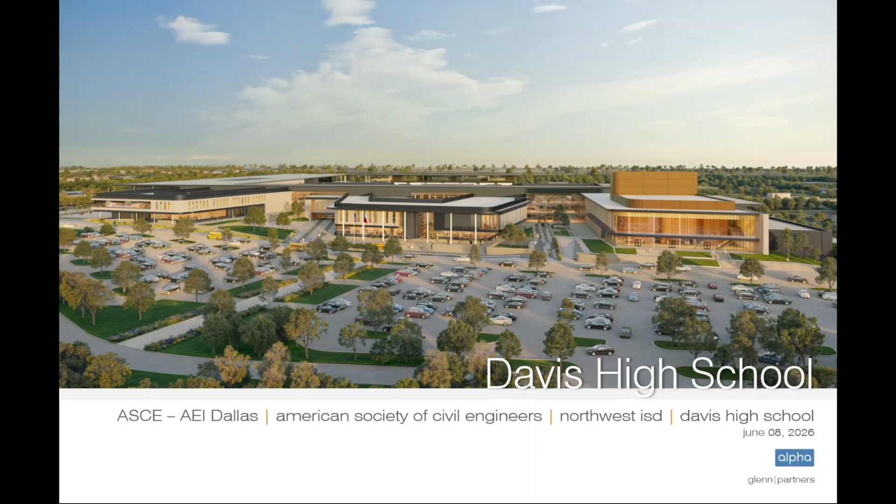Good morning, everybody. My name is Patrick Glenn, I'm the architect at Glenn Partners, and I'm not going to talk a lot today. The project's actually going to speak for itself. It's an amazing project. We couldn't do projects like this without Jared and Stephen and their firm, Alpha Consulting Engineers. We've pushed them quite a bit architecturally, and I think you'll see that in the presentation.

There's a lot of stuff written up on the screen, and I'm not going to sit here and read it to you, just for brevity of time. I'm just going to go right into the design team. I think we had a wonderful introduction this morning. Again, my name is Patrick. This is Levi, Stephen, and Jared.

All I want to do is just highlight a couple of things as it relates to project numbers. So 795,000 square feet in this high school, all on one campus, which is pretty absurd. It's on 128 acres, and these 128 acres slope about 75 feet across the site, so there's a lot of split levels throughout the design. $465 million. 145 classrooms — in fact, I counted these yesterday, it was actually 146.

Those 146 classrooms serve 3,200 students when this high school gets fully built out. There are 4 distinct learning houses with 4 different outdoor courtyards that support those. A 7,500 seat stadium, a 1,200 seat theater. I think there's an arena that seats about 3,500. It's just over the top on every single element of the project. So I'm going to stop talking and let Levi, Jared, and Stephen actually show you all the details.

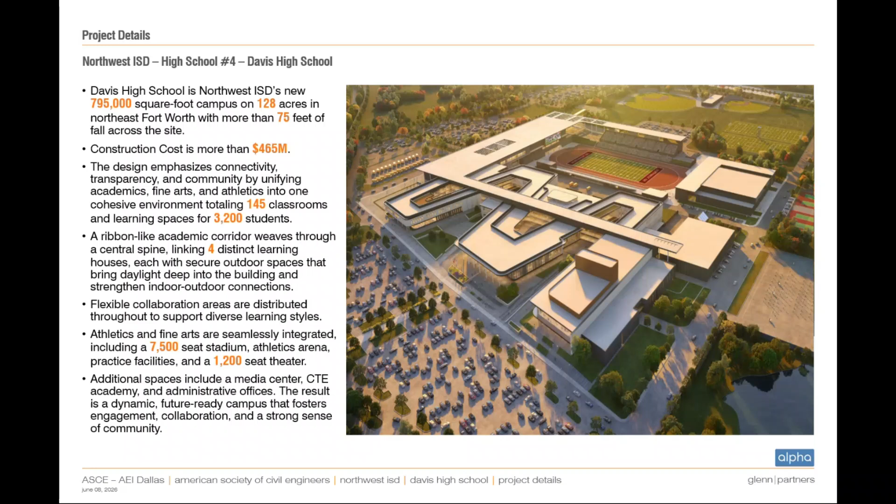So we'll start off with our site analysis. I'll try to keep this brief. This star is located where our site actually is.

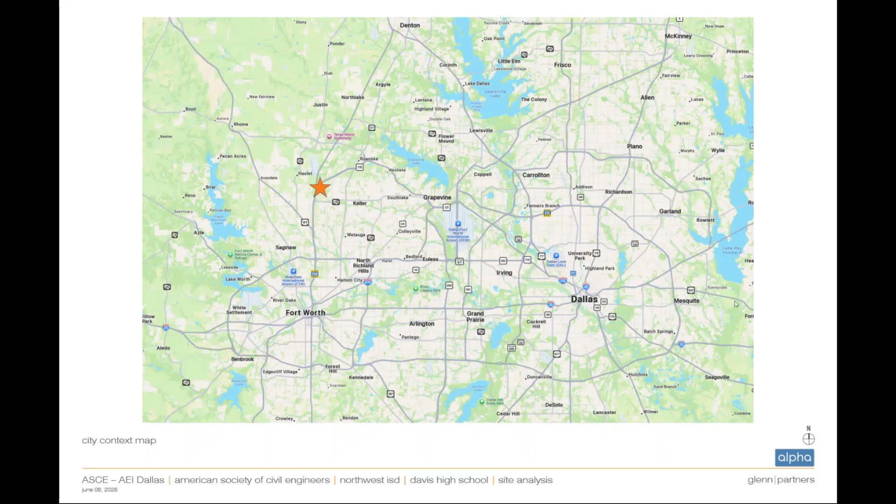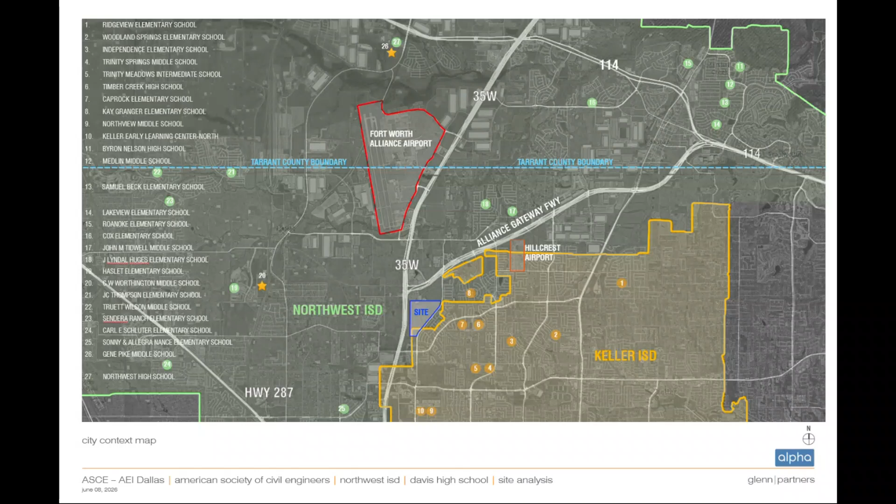It's right up near Alliance Airport, right across the highway from it. You can see Alliance highlighted here in red, and our site's that little blue triangle next to the Keller ISD map. So this is actually on the boundary of the Northwest District.

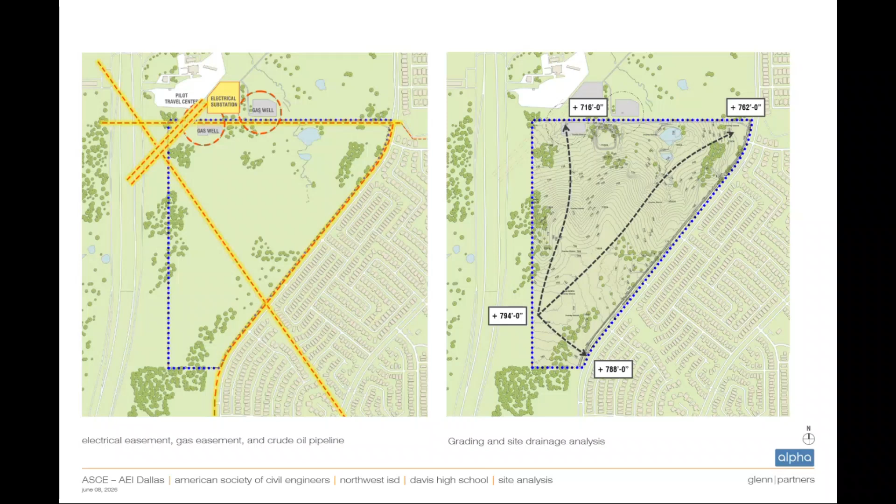Probably one of the most challenging sites I've ever worked on. As Patrick mentioned, there's 75 feet of fall on this site. It's not flat, it's not square. It has a few easements running through it on the left - a lot of easements, actually, which made it really challenging to site everything on the project and all the program elements.

Just to hit a couple of highlights here: there's 83 borings on the geotech. I think we've got over 8,000 feet of retaining walls on the site, which was a record for me. It's a lot.

Subgrade zones - we did slab on grade and slab on void, with different elements to that. Almost 3,000 piers. Just over 4,500 tons of steel. And our spine corridor length, which we'll get into in the plan, is over 1,100 feet long. So it's a pretty massive undertaking.

Our design concept started with looking at the airport and our context of where we were - a concourse versus terminals kind of theme. You can see our main spine, which we treat as the concourse, like the orange hallway running north-south. And then all of our classroom wings follow that ribbon in yellow.

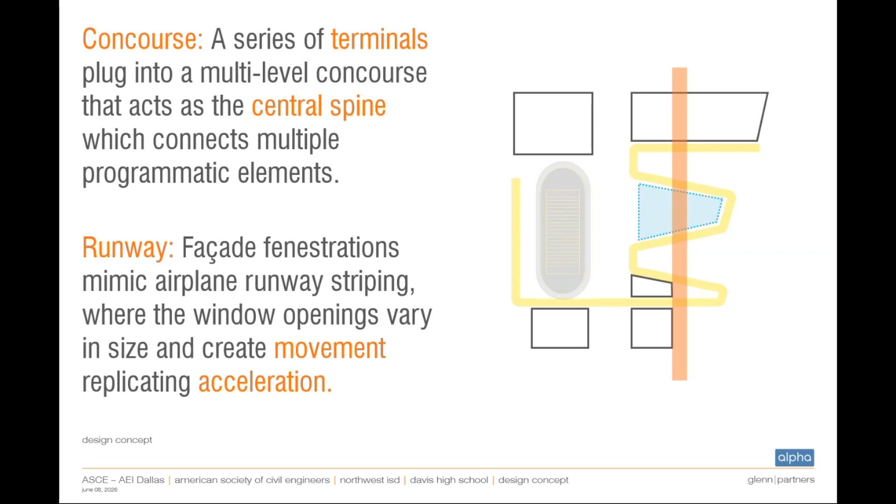They're kind of terminals plugged in, so each learning house has its own floor. Some elements are 2 stories, some are 3 stories. At the facade fenestration points, we looked at runway striping, dealing with the speed and acceleration of planes taking off, and that informed our language for the fenestration on the facade.

So here's our site plan as it is completed. You can see we had a lot of things that fit in there. We actually did a bit of a land swap to get everything to fit, but we really had to do a lot of work to make everything work around the easements and whatnot on the site.

It's got full baseball, softball, practice fields, a stadium, wetlands, a pond. We're going to end up with an ag facility on the northeast corner that's under design right now. So lots of elements.

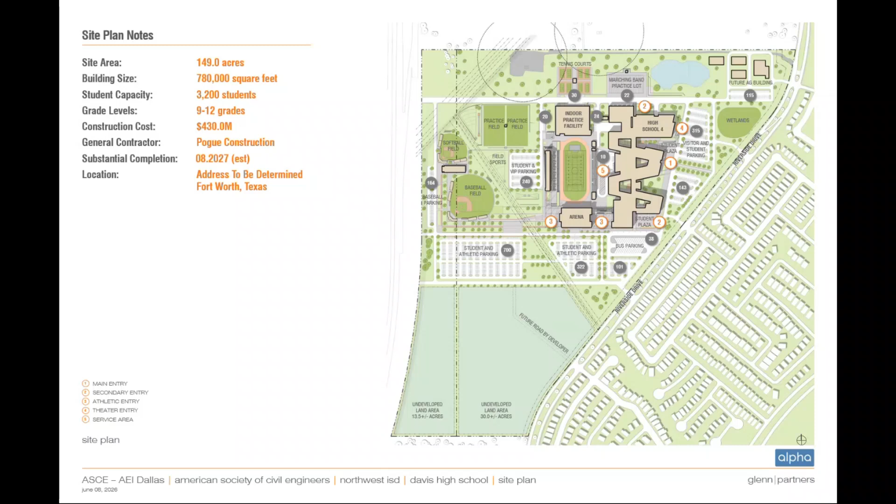Floor plan - this is basically just to orient you. We'll look at this in a few slides in the future, but our main entry is here off the east side off of Riverside Drive. That main spine runs north and south, so there's parent and student drop off on either the north or south end, and we have all of our main services and utilities coming into this interior fire lane, like our kitchen and main electrical service.

Arenas down here, theaters up on this end, and then the classrooms undulate around that with the stadium being wrapped around by the entirety of the building and program.

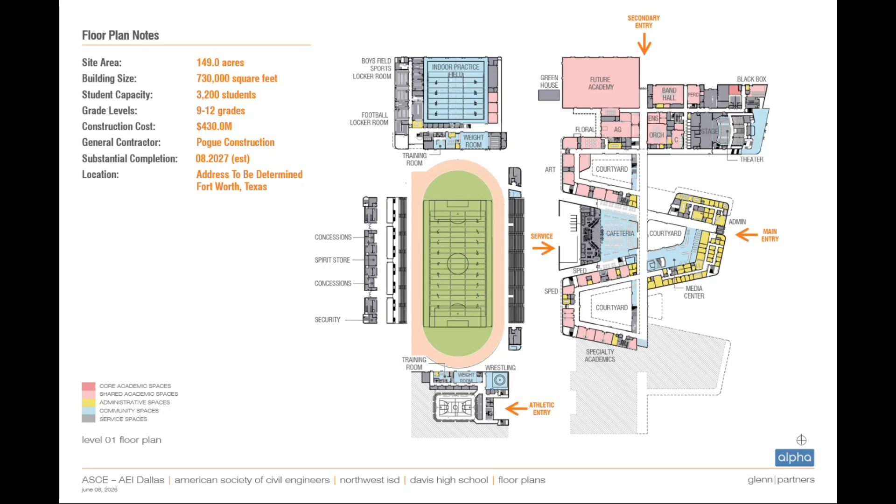On that note - Levi, Patrick... My name is Jared, consultant, the EOR on this project.

We tried to keep everything as practical as possible, so all the turns were about 12 degrees each. We had to figure out all of the brick coursing, so every angle and curve, I figured tangents and all that, to get it all in increments of 8, or as close as we could.

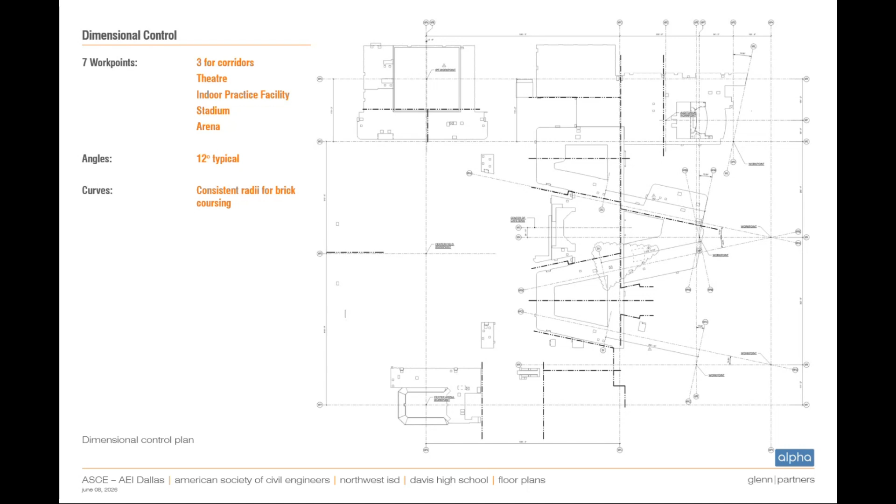This is our lateral system plan, showing all the different lateral systems used throughout the building. The red are shear walls - CMU or ICF concrete shear walls. The green are moment frames, all the way down the spine in the middle, 30 to 40 feet on center. Vertical braces are scattered throughout, a little difficult to see.

And expansion joints are in the blue - we segmented this building because it's so big. I think we ended up with like 14 different structural buildings based on all of the expansion joints.

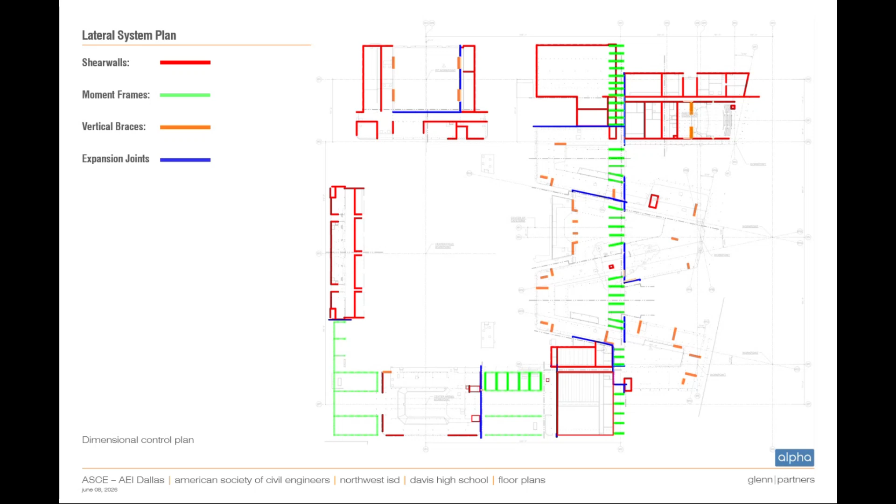So this is, I think this is pretty cool, because this is their first hand sketch of what the facade and exterior would look like. You can kind of see the spine running through the middle, and then the ribbon, the academic corridors that go out through everywhere.

So we have a video, I'm not sure if it's going to play or not, but basically it's making fun of architects. There's a doodling like this, and then we got to make it all work. So then it comes to the contractor, and he's like, yeah, what's the cost for this? Well, we didn't tell you the cost. And then it gets to the fabricator, and goes, what? What is this? So even in design, I mean, we had to talk with the contractor and fabricator and make sure everything would work because we're doing some pretty crazy stuff.

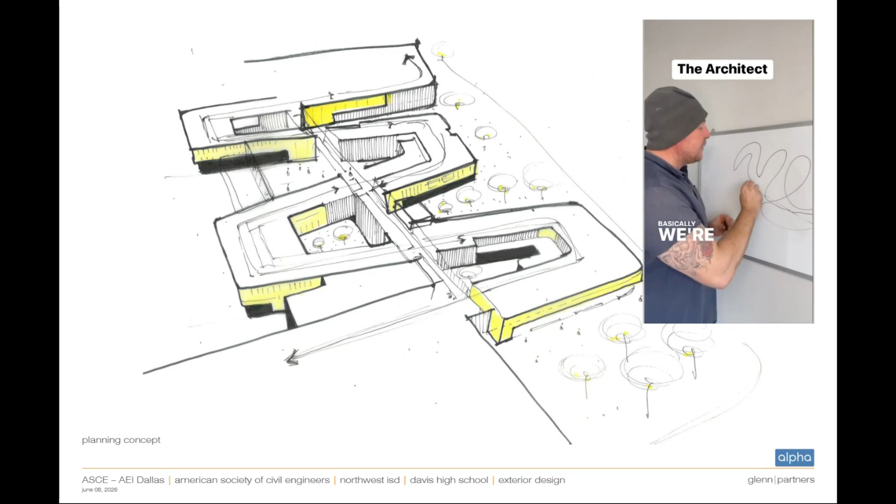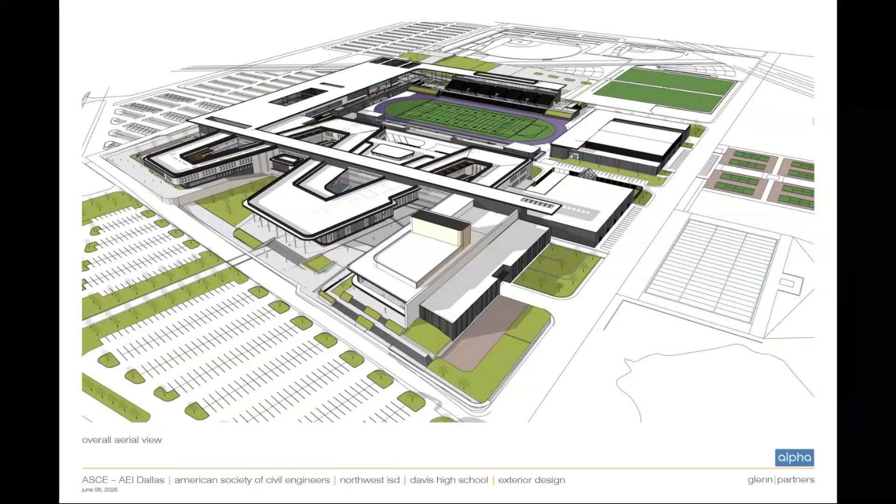Anyway, so from that sketch, this is the SketchUp model that was produced, and it gets pretty close to what the final product becomes. So there's the rendering from the SketchUp model. And then from there, we bring it into Revit for our designs. That's the structural Revit model. So it's still pretty close to the original.

You can see all the retaining walls everywhere, back here for baseball, following that easement that goes across there. There's a pond down here, so cables for that, and all these landscaping terraces.

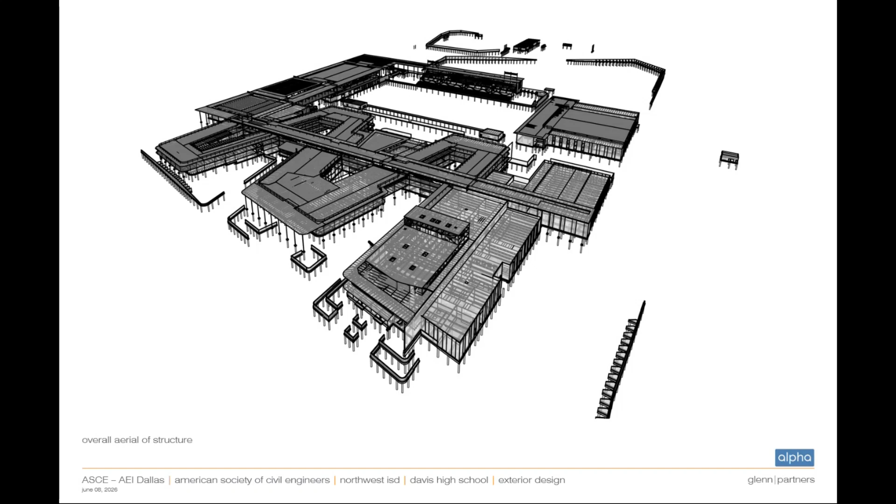Things like that. So there's the construction photo from where we are. That was taken this morning, actually. So that's how it stands today.

So there's a lot of things that we could talk about, and we're going to keep this brief for 30 minutes. So we kind of focused on 3 areas throughout the project.

But there's a lot of honorable mentions, and all the cantilevers, we call them up and top. That's the first floor is one side, the second floor is that side, third floor, just keeps on going. The majority of all of the corners in this building are curved, so we had to figure out how to cantilever in curves multiple times.

So the first one is the main corridor, the second one will be the cafeteria stairs, and third will be the theater. So this is a rendering I showed a client earlier for the main corridor.

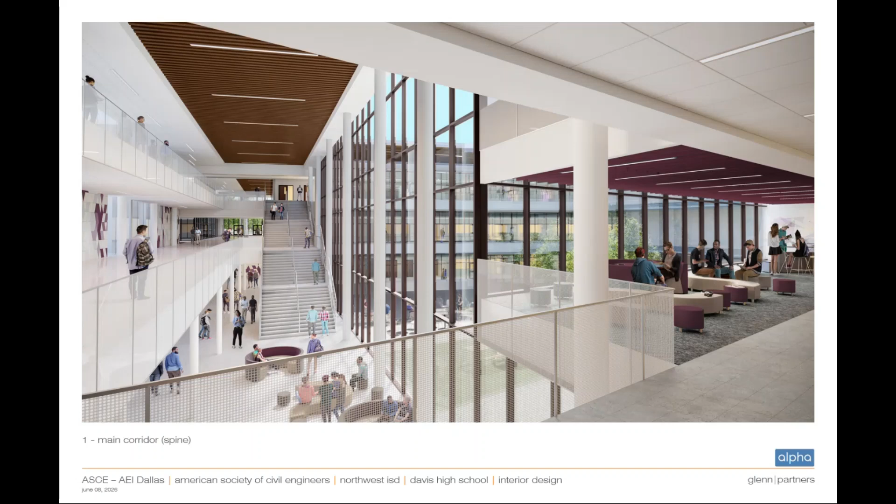So this is the spine that runs all the way down, and a couple of these grand stairs can go across each level. You can see this side here, there's nothing behind there, so that's just cantilevering off of this column. Down here, we were fortunate to get 2 columns, but up here that would block all of the views, so couldn't have that.

This here is what it looks like today. So it's pretty close to what the rendering was. Let's see.

So this is how we got it to work on the nuts and bolts. So on level 1, like I said, we had the 2 columns down here, but on level 2 to 3, we wanted this to be open so you can have nice views all the way across that spine.

So when you stand on one end, it's over 1,100 feet long, you can basically see the curvature on this thing, and there's no columns this full way. It's just these little finger beams that stick out, and from the column to the edge of that is about 14 feet, I believe. So getting that to work with vibration, with all the students walking through there, was a feat.

And we ended up going with steel columns that are filled with concrete for the fire rating. And then for this main corridor, we used these moment frames all the way through. So they're basically composite columns, steel and concrete.

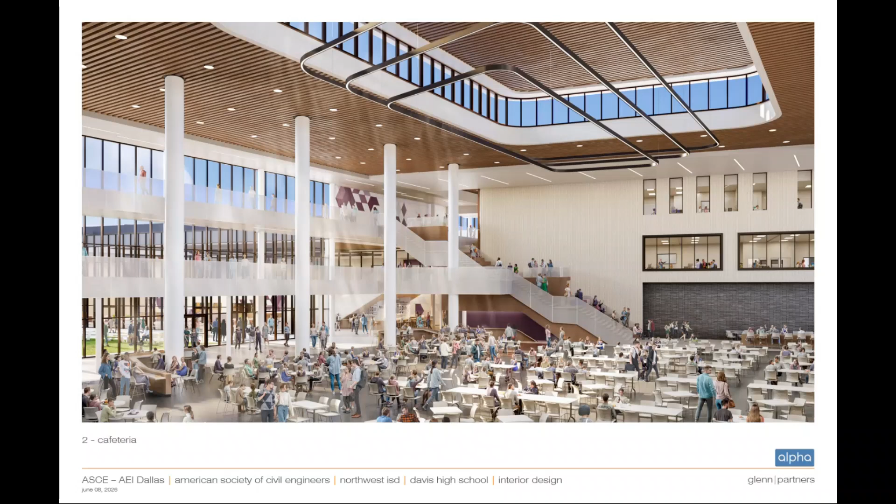Yeah, so here's the one meme. Architect letting me show some crazy renderings to the client, saying keep quiet. Good.

So this is where we're at right now. It's pretty close, as you can see. There's only 4 columns, pretty big columns granted, but going down that corridor, they look like that.

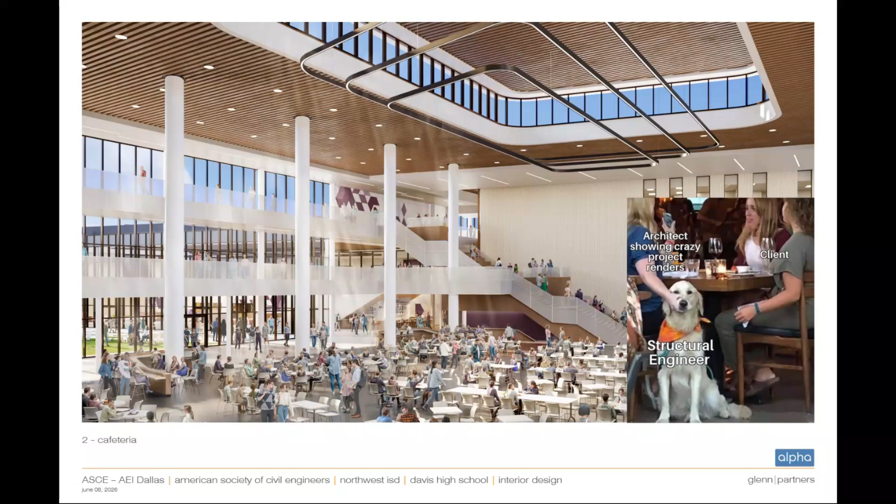So one of the second big challenges on this project was getting this landing right here to work. As you can see, there's only one column that goes all the way up back here, but this whole thing is floating up here.

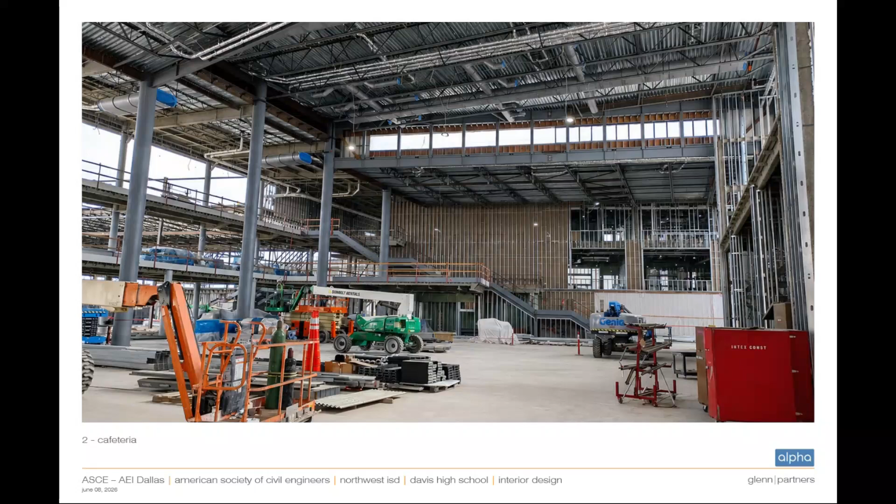So here's another view of that. If you're standing underneath it, this is cantilevered about 23 feet, something like that. And that's hard to see, but the ceiling is right next to this beam underneath.

And then it comes down, bulkhead, and it goes this way. So we added a little kicker and tapered this beam right here. And this is supporting all of that floor back here, all the way to that column. So even at the column, it's cantilevering out quite a bit. I had a couple of sleepless nights on that, but it works.

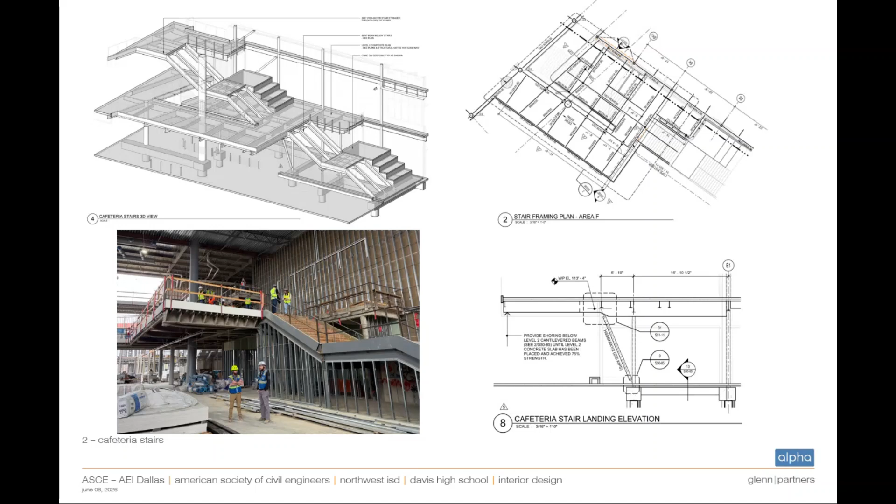So, yeah. And I'll hand it over to Steve later.

Well, thank you. So for this picture, we actually had to go into 2027 when the building's complete, and we got a picture of me there and put it in the presentation. Because that's what it's going to look like, but obviously it doesn't look like that now.

So as you can imagine, a project this big requires an army. Obviously Jared is working on a portion of the building. We had another guy in our office, Caleb, working on the academics. And one of the areas I worked on was the auditorium, which was definitely a big learning curve.

And that has to do with fire curtain requirements. Once you get a certain height, you need a fire curtain that can raise the full height of the stage and proscenium above the stage, and then you have a fly box above that, and then you have your roof above it. So in total, we're right around a little under 80 feet.

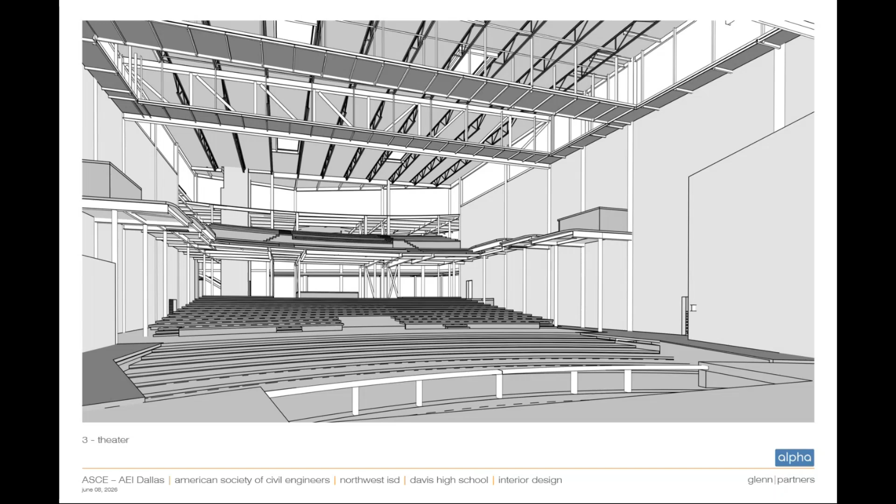At the second level, we have the steel framing for the balcony, and the balcony itself had two different tiers.

This is looking at the balcony framing. This is maybe back in April, I believe, when we did a site visit out to the project with our office.

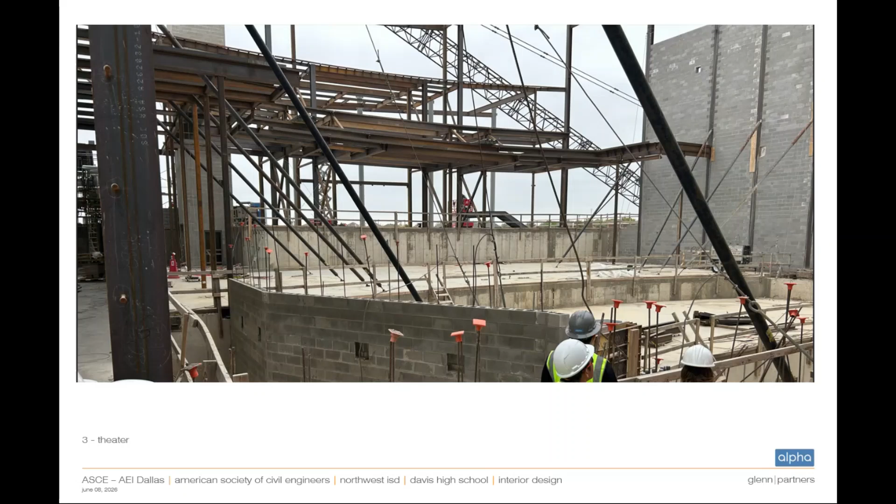Here's some of the balcony framing up there—I'll give a better image of that in a second. But obviously there's a whole lot of shoring that has to go in for these very tall walls, and you can see steel columns integrated in between. Even though the columns are doing all the work for gravity, we tied them together to the walls mainly so they would move together for lateral, keeping gravity and lateral systems separate.

Here's an image of the Revit model for just the balcony portion. We felt this would be helpful for the contractor to see because there was a lot going on. Just looking at this 3D plan, there's a whole lot of text that gets very confusing very quickly.

Here's an image of the current construction, very recent. This is just one 2D frame from our model that we use—we used RAM Structural System for designing our composite steel beams.

If you're familiar with how the design goes, once you hit negative moment, the beams can't be composite anymore. So with these cantilevers here forming the balcony, they had to be designed in RAM without accounting for composite effects—with all the weight from the concrete, the superimposed dead load, the superimposed live load, and obviously deflection was a big thing here.

So we have a cantilever and then another cantilever, and four different of these frames—this is what you won't see once all the step seating is on top of it. Basically, what we wanted to do was limit this deflection.

One way we did that—there's a big note up here you can't read, but it basically says make sure you fabricate this beam with a camber curving upward about 3/4 of an inch. That allowed them to not have to shore this beam when they pour concrete.

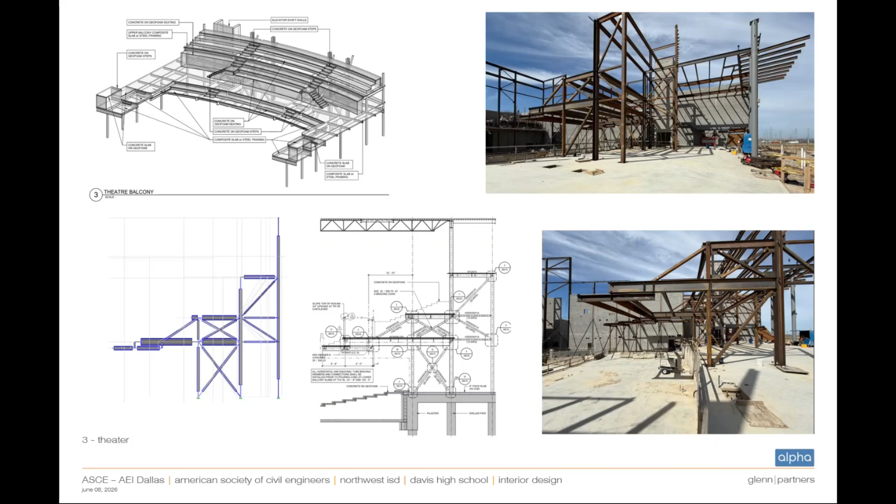We also wanted to make sure we got the load ultimately up to the roof. There's a roof deck here you can't see, and we wanted to get it up to the diaphragm as quickly as possible.

Okay, so this is just the renderings versus the construction progress—we can see what the initial ideas were and how close they became to reality as of today.

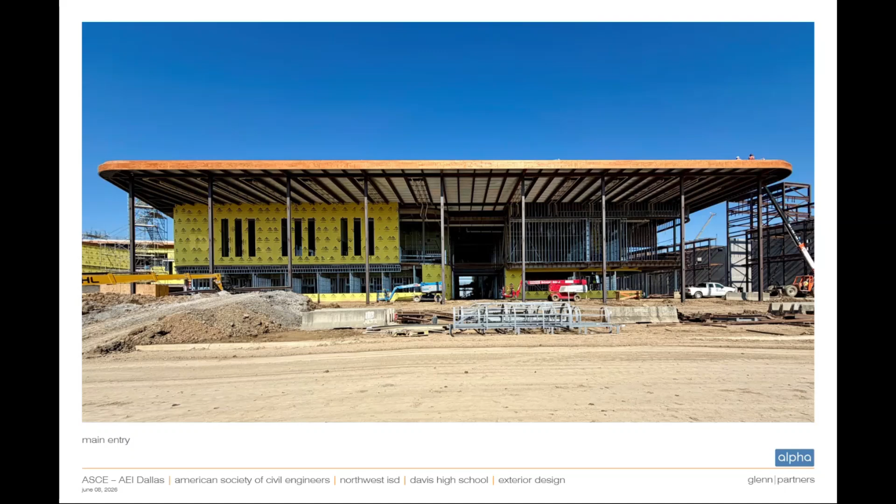Then you can see barely the roof drains that come down, going inside these columns. Here's the theater entry, same kind of thing.

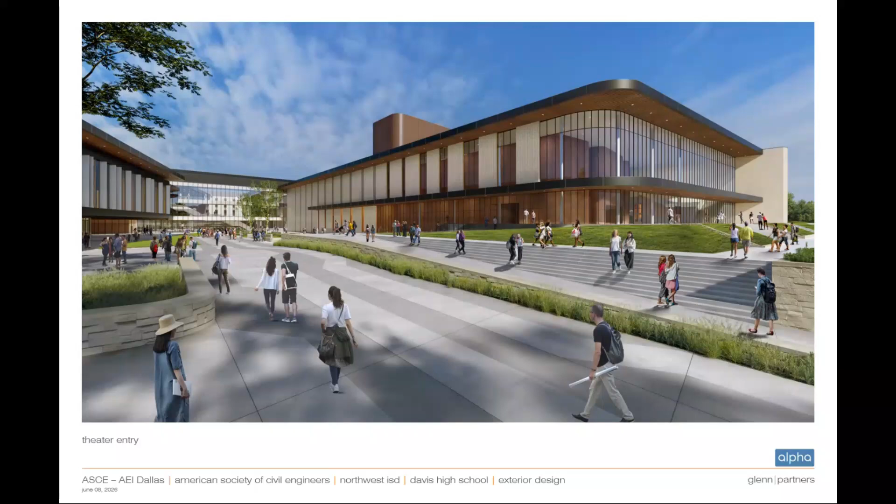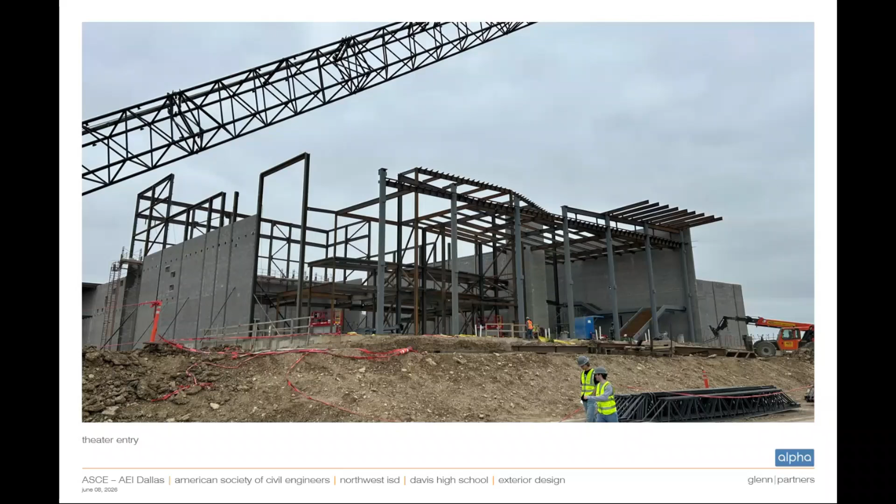This is looking back at the theater here—this is where we're standing right now. Cantilevers over here, see all those things protruding out there, like Steve was talking about, the steel integrated into the CMU. Here's the fly loft back here, behind the stage.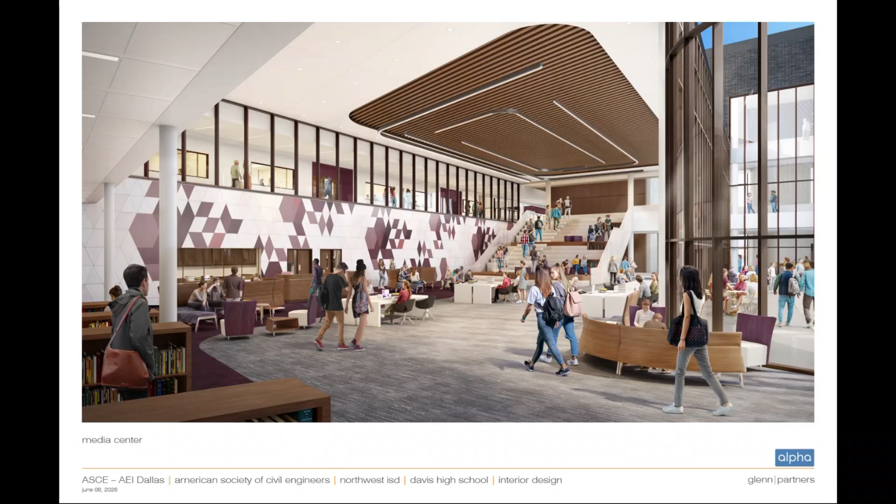This is a view of the media center, because they don't do libraries anymore. Gone are books, in their place iPads. It's pretty open, with a learning stair here. This view is standing over here, with this guy looking out. It's pretty close to what the rendering was.

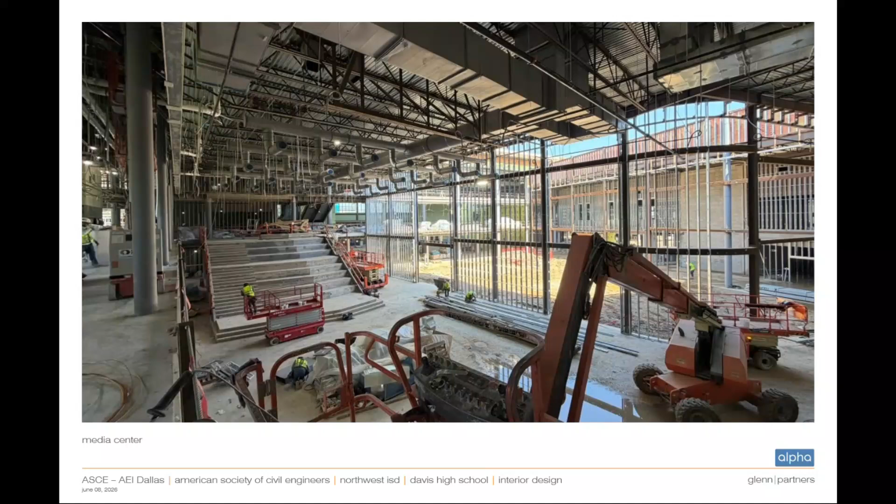City learning stair. Here is the arena. You can enter on level 2 and then it dips down to a level on all 4 sides. See these trusses up here.

Here's a similar shot structure and kind of a panoramic view. They had to leave a big section out to get all these cranes to come in and erect all these space trusses up here. Trying to get a scale figure in there, those trusses are about 14 feet deep and about 150 feet long.

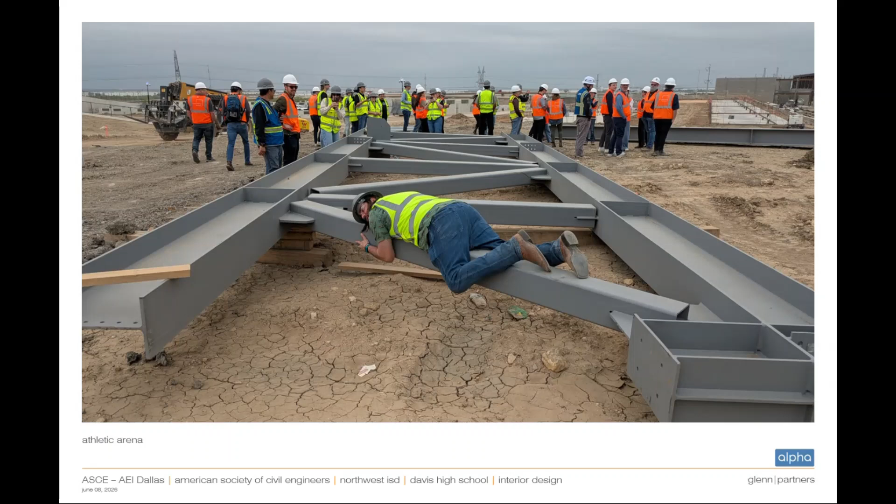Here's the site right now. All the CMU walls are up in this stadium, and my main focus is on the academic portion. Here's the spine that runs all the way down the whole thing.

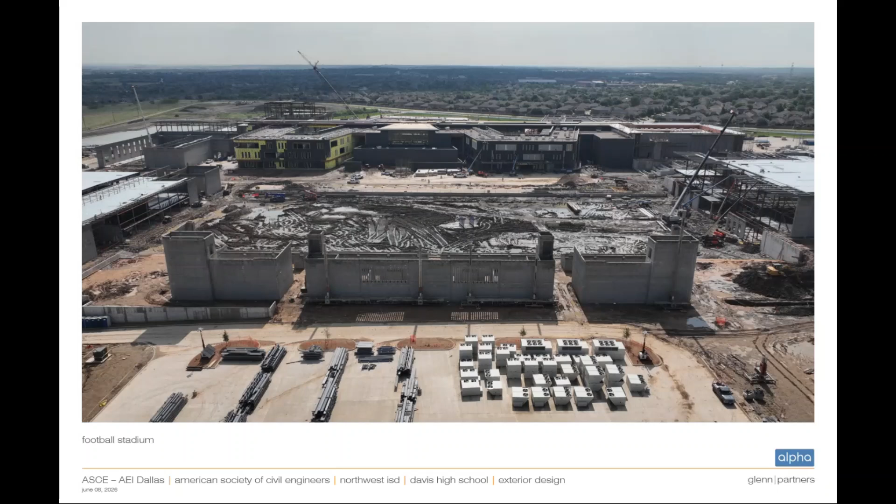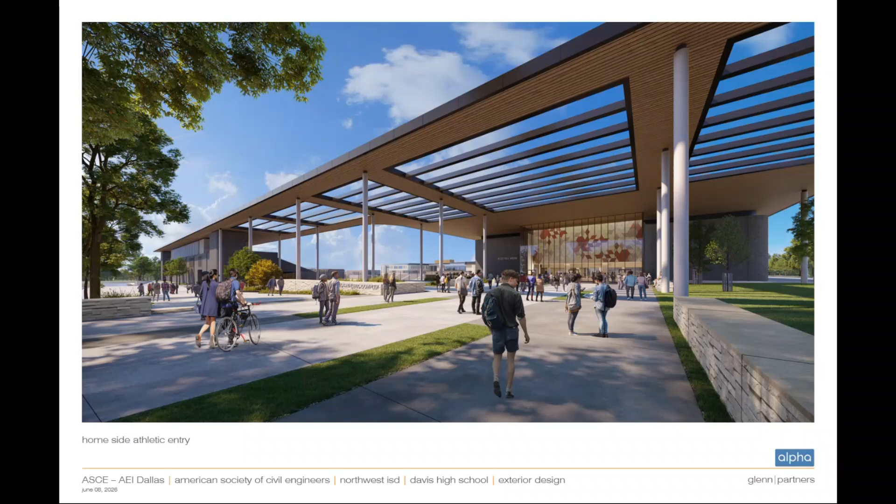These areas have not been constructed yet, but they are the pergolas, the service shade structures as you walk into the arena and stadium. Here's the arena and stadium over here, and the field will be sunk down on that side.

Here's another view on the other side of the arena. There's a bridge right here that has all the locker rooms and coaches' offices, I think, and then you walk down to the field over here. So that is the project.

Does anybody have any questions or anything?

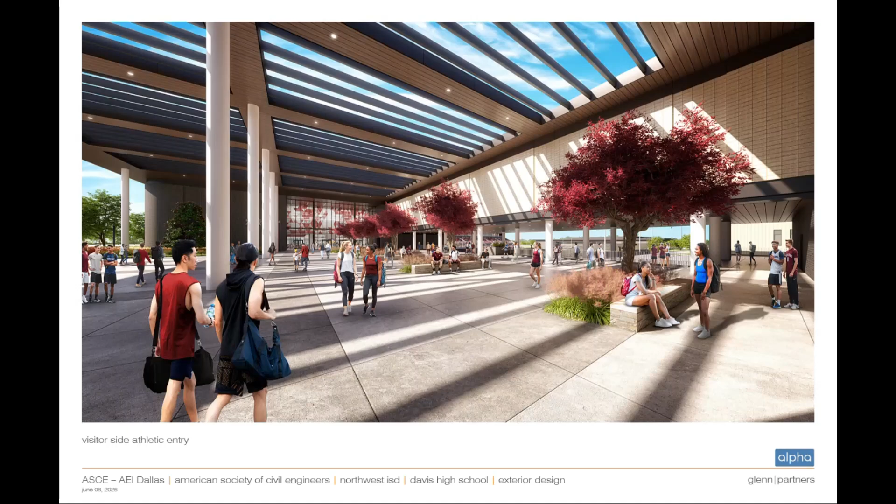First question, the tornado shelter — oh, good question. It is the student union for this, so it's on the southwest side. Here, finding the overall site, it is right there.

Yes. Every sheet had a cloud on it — every sheet had chalk marks with a cloud on it. But yeah, we did quite a bit of that.

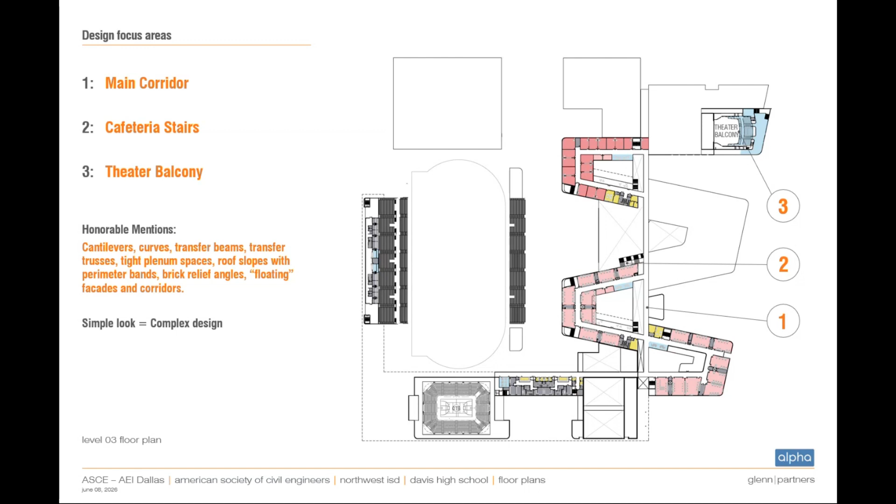Follow-up question: did any connection detailing affect the actual design at the end of the day? Yes and no. There were some instances where, with scheduling and everything, we maybe miscalculated once or twice on a transfer beam or something like that. So we had to go to the connection engineer and say, we need to take a deeper look at the connections, we can't get this to work, here's what needs to happen. We maybe had to add a kicker here and there, something like that.

Thank you. The erection sequence had to be completely rethought after the drawings were complete, because it's right next to Alliance Airport, and there are height limitations on cranes, so they had to use more cranes, but lower ones. They used 3 different cranes to set those trusses across the arena because they were so strapped for crane height — it really has been a challenge getting everything right. I think the FAA actually came out on site, setting regulations for their cranes.

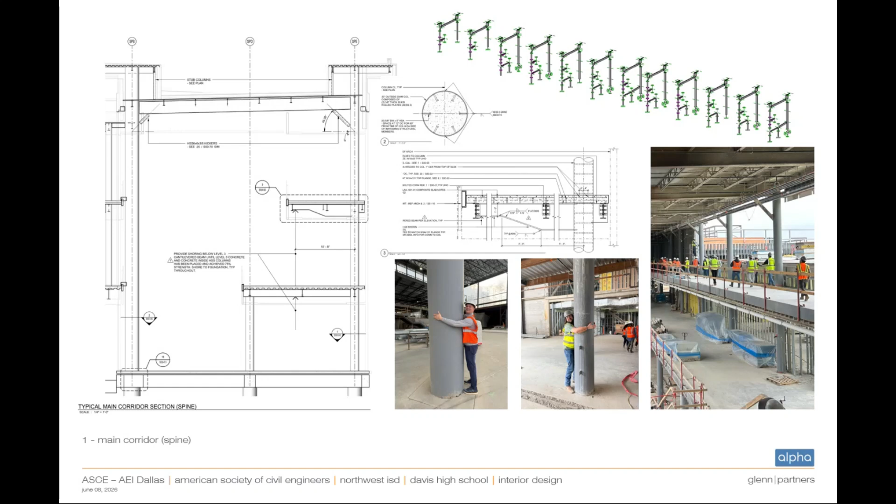I think they were - so we actually had buttresses on the back side for those. The majority of them were just cast in place concrete walls, grade beams and piers, with heavy pier downs for such forces. We used free-draining backfill for the majority of them with the pressure drain, to reduce those pressures.

I have a question - what type of contracting method was used? Was it design bid build, or was it progressive design build? Yeah.

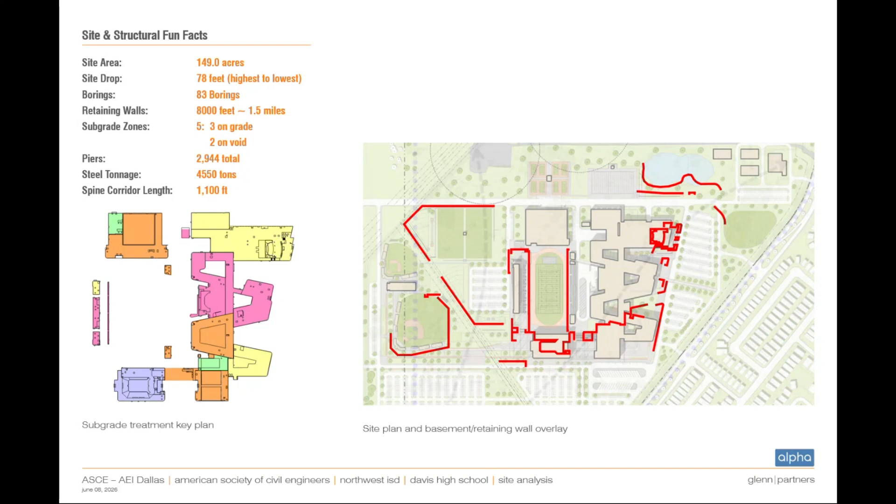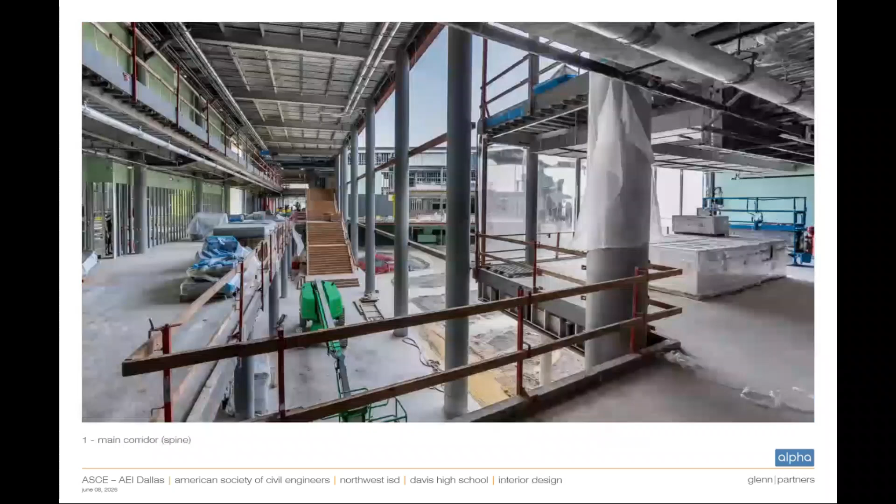Can you talk about the canopy for the stadium? Sure, I'm curious - is it PVC, PTFE, any variation of it? If you're talking about the fabric elements, you do have a cantilever roof structure kind of out over it, because why not, for the cantilever and everything else.

When you look at the stadium, it definitely has an eyebrow on it. That steel structure has a metal soffit panel on the bottom, and then a single ply roofing membrane above most of that. So it's rigid. Okay, from the rendering I thought it was flexible. That's cool - maybe we'll push it a little further next time, but for now, yeah, it's all rigid.

All jokes aside about how crazy or stupid we were, a project like this just does not come around - it's like a once in a generation project. So when you have a project like that, you don't try to hit a single, you try to hit a home run. That's why there's all these crazy elements you see in the project, and Jared, Steven and their team at Alpha were absolutely amazing trying to make all of those crazy ideas come to life.

Aaron, who's not here today, one of the project designers, and I were walking through the facility about two weeks ago, and I literally stopped and said, I cannot believe it's real. It's nuts - the building and the design is going to be great.

Any more questions? We still have time for a few more questions. No? Well, thank you so much, speakers today - it was a great presentation. Looking at this presentation, I want to go to that school.